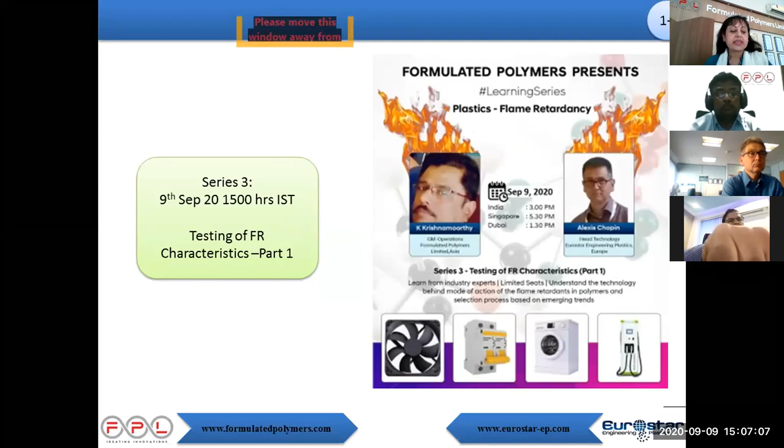So now after completing series 1 and series 2 - series 1 we discussed the history, need, and ISO classification of FR chemistry. Shekhar and Alexis both had given presentations and it was in so much high demand that we had to do a repeat series for that. Series 2 covered the FR mechanism and selection criteria.

Testing part 1 we are doing right now. Testing part 2 is scheduled for the 24th of this month. And then we will also be covering various standards, processing, and design perspectives. We have a total of around 12 series which have been planned by us.

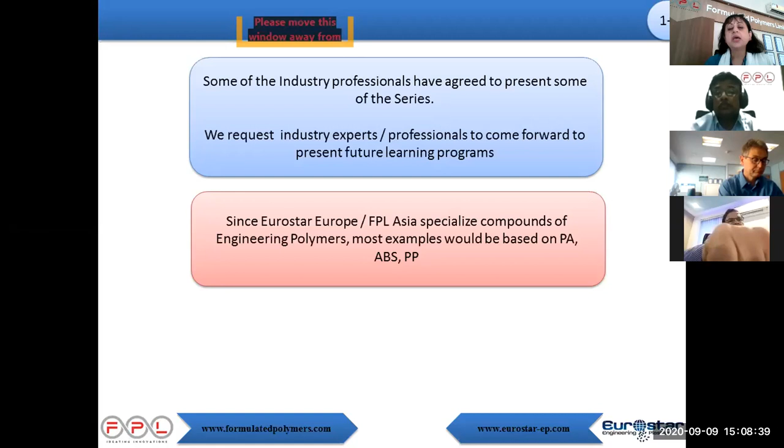Since Eurostar Europe and FPL Asia both specialize in engineering plastics, most of the examples are based on polyamides - both polyamide 6, 6,6, 4,6, etc., polyamide 12 - and ABS as well as polypropylene.

I would like to introduce the panel members. Shekhar is the director for Formulated Polymers. We also have Rasim Gibbs, who is the technology and marketing director for Eurostar.

Then we have the speakers. Mr. Krishnamurthy, who is general manager operations at Formulated Polymers, has a master's in science and over 29 plus years of experience in plastics. He has worked hands-on right from design, development, quality assurance, and compounding. He has a very versatile experience and has developed more than 300 new products in his career for the electrical and electronic segment as well as the automotive segment. He will be handling in detail the UL 94 flammability tests.

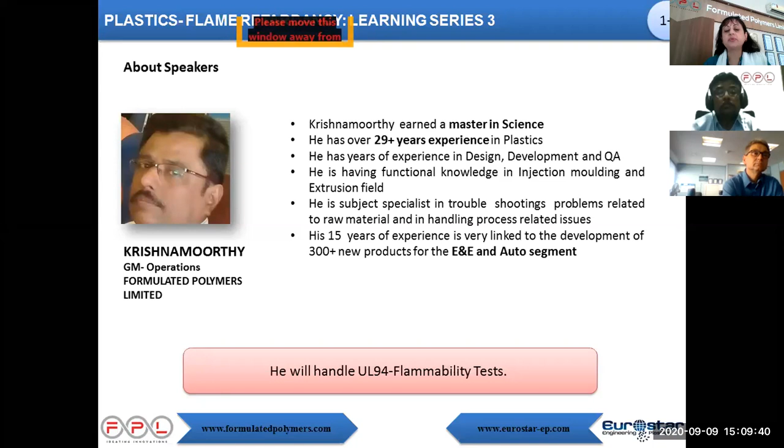The second speaker, Alexis Chopin, technology manager from Eurostar Engineering Plastics, has a master's in engineering from ITech Lyon. He has 25 plus years of experience in formulation, compounding, and application development, having worked quite comprehensively and extensively in the electrical and electronic segments. He's a co-applicant to many patents in FR engineering plastics and a specialist in low voltage and medium voltage control FR design. He will be discussing the glow wire test in detail.

These are the two tests which we identified, and we find them critical as far as flammability applications are concerned. They're also correlated with application testing. That's the reason why we are going to be covering these in much more detail.

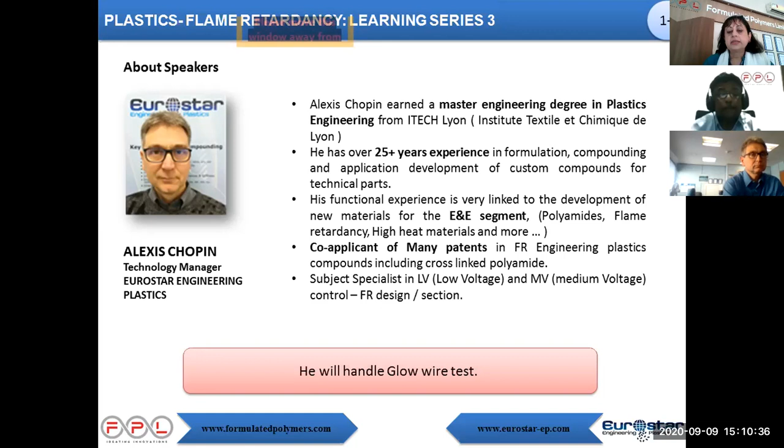We have done series 1, so I'll do a quick recap. Fire accidents are due to plastic usage, which has led to extensive use of flame retardants in plastics. Shekhar discussed the reasons why we use plastics and how they evolved over the years, from thermosets to thermoplastics like PVC, and now to engineering plastics.

For all those who missed the first presentation, we have the YouTube link available. Alexis, in that same presentation, discussed ISO 1043 and went into detail regarding the codification of the polymer used, the fillers, plasticizers, and flame retardants.

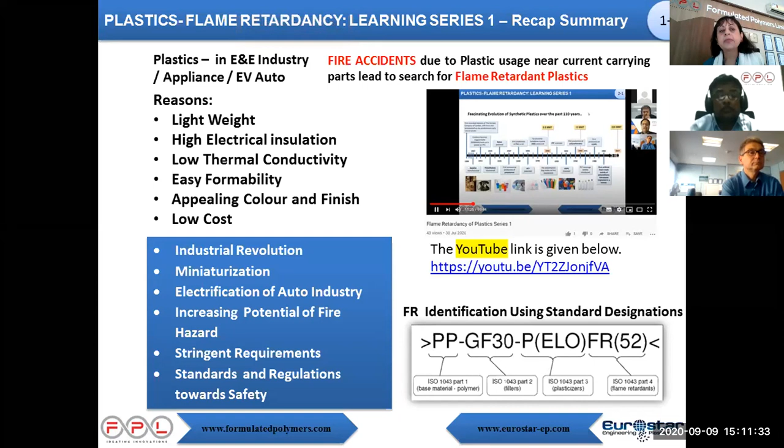We also did series 2, on the flame retardant mechanism and selection criteria. We discussed endothermic reactions, radical quenching, and thermal shielding processes. We also discussed in detail the halogenated nitrogen, organic and inorganic phosphorus compounds.

We also had a discussion on metal oxides, hydroxides, salts, boron and zinc compounds, silica compounds, and in specialty we went into polyvinyl alcohol. So we discussed almost all the flame retardants being used globally, and why one flame retardant is preferred over another.

The trend is towards more environmentally friendly and compatible FRs, mainly driven by NGOs and OEMs. Legislations like ROHS, REACH, and government legislations for each country are becoming more and more critical, and due to this we have also comprehensively decided on the selection criteria.

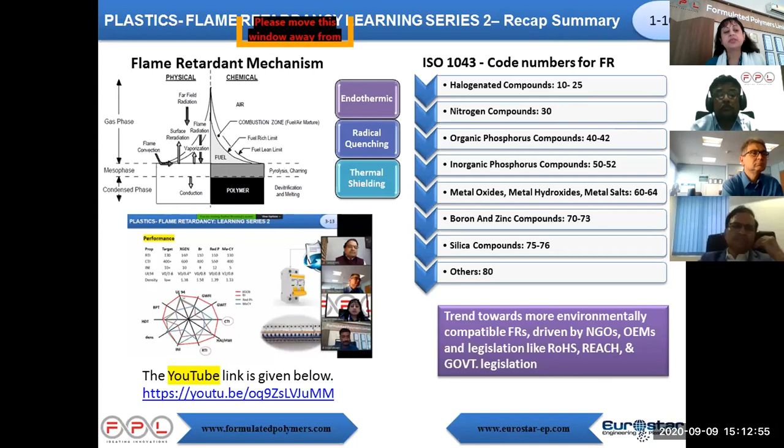Thank you, Rashmi, for my introduction and brief recall of previous webinar topics. Hope I am audible. Good afternoon, good morning, and good evening to all participants of today's webinar. In the previous webinar series, we discussed how plastics are converted into FR plastics and various types of FR formulations.

Formulation and product are ready, but it needs to be tested and validated before going to market. All pros and cons of product formulations need to be found before release as an end product. Testing is essential to find the strengths and weaknesses of a product. So in today's discussion, we are discussing testing of FR materials.

This slide shows various types of tests to measure flammability characteristics of materials. In UL 94, we have a variety of tests like horizontal burning and vertical burning. In vertical burning, we have a series of tests: V0, V1, V2. It tells the burning characteristics of the material.

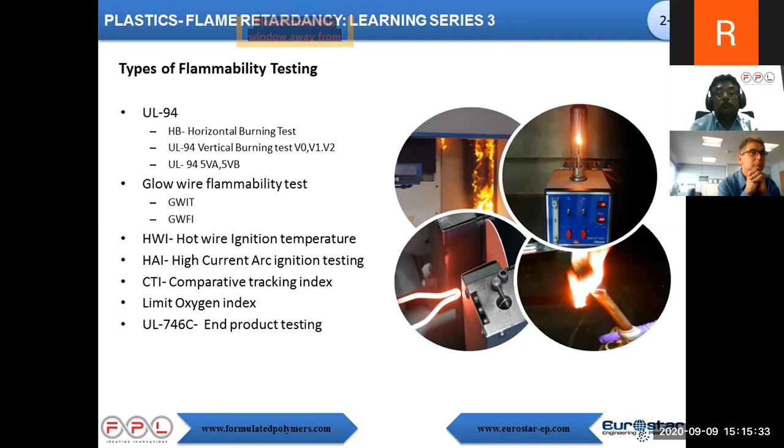Now we are going to discuss UL 94, which is the test for flammability of plastic materials for parts in devices and appliances. Before going into that, why do we need to follow the UL test method? This question arises in our mind. The reason is UL is an independent certified body of standards for safety, started in 1894, with almost more than 125 years of experience now.

Previously, raw material and end products were tested separately and reported as accepted or rejected. But UL changed this approach and tested raw material performance in the end product and reported accordingly. UL is uniquely positioned to provide a complete view of how the product functions within the given system, which is particularly critical for the plastic and component industry.

It helps to ensure safety for both users and manufacturers. The end product is less prone to malfunction, and it minimizes replacement cost. So the industry overwhelmingly accepts these test methods.

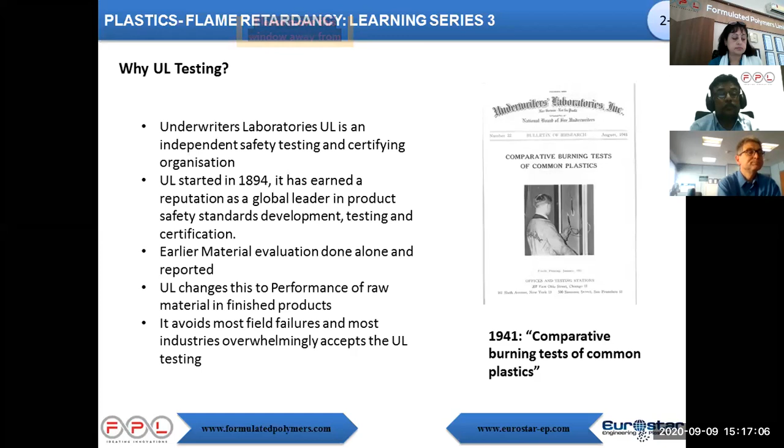This series of tests can help determine how products will react when exposed to flames.

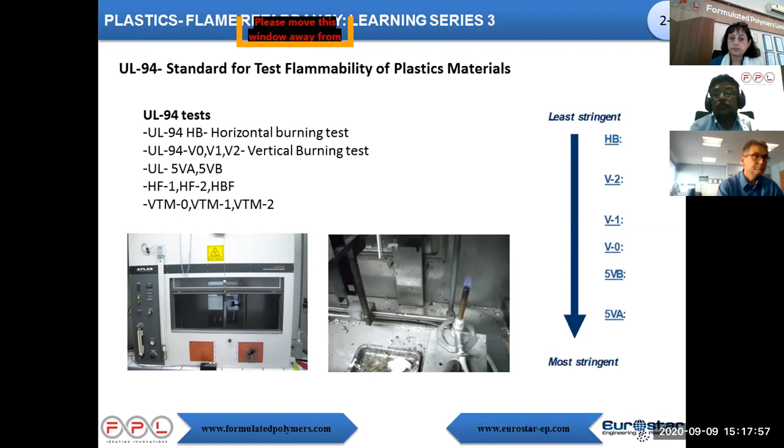Now we move on to test apparatus requirement and setup procedures. We need to confirm testing equipment or apparatus condition before going to any test.

First, we start with the specimen. Test specimen should have standard dimensions. You will prescribe the length, width, and thickness of the specimen.

For HB and V0 vertical burning, we follow a specimen length of 125 mm and width of around 13 mm, with a tolerance of 0.5 mm. Thickness is also important: it should be around 3 mm for horizontal burning, and for vertical burning it starts from 0.025 mm up to around 13 mm. So the maximum thickness should be 13 mm for all UL 94 tests.

Next important lab equipment is the burner, which is the heat source. The laboratory burner tube length should be maintained as per the dimension given on the slide: 100 plus or minus 10 mm. The burner should comply with ASTM D5025. Burner mounting fixtures have standard dimensions too, and it requires mounting at a 20 degree angle for some tests like 5VA and 5VB.

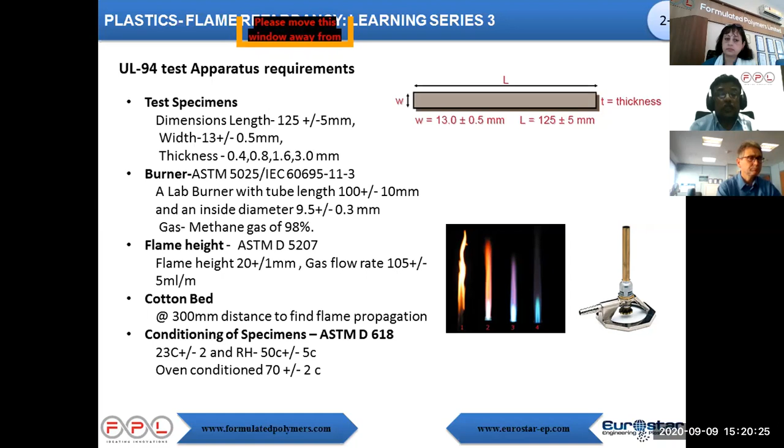Now we move on to horizontal burning test. In the horizontal burning test, the specimen is clamped in a horizontal position. The HB test is widely followed in the auto industry, as it tells the rate of burning of the plastic material used.

It helps the auto industry in a big way. Rate of burning of material helps calculate escape time for passengers in vehicles. HB rating is normally required for decorative items, unattended household items, air dryers, etc. It's applicable for all products, irrespective of flame retardant or non-flame retardant.

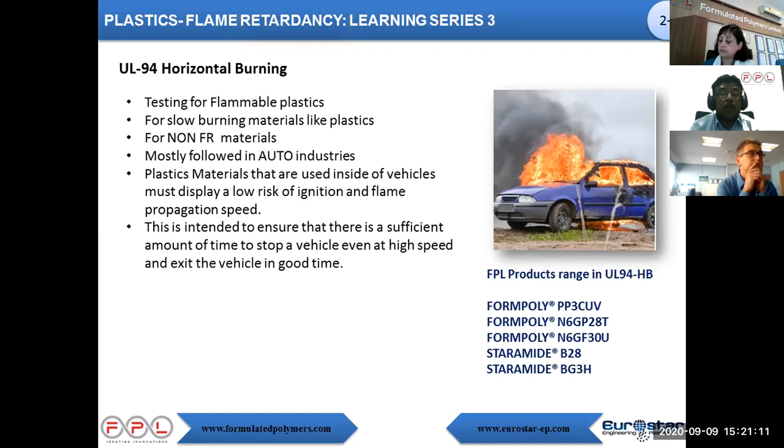Next, the slide shows the HB test procedure in detail. You can see a specimen of length 125 mm and width 13 mm positioned in a clamp. Ignite the specimen using the burner with a blue flame. The ignition time should be 30 seconds.

After the specimen burns to reach the 25 mm mark, we start the clock and find the burning rate. The acceptance criteria require a burning rate of 40 mm per minute for a thickness of 3 mm and more, and 75 mm per minute for thickness less than 3 mm. Fire should switch off before the 100 mm mark.

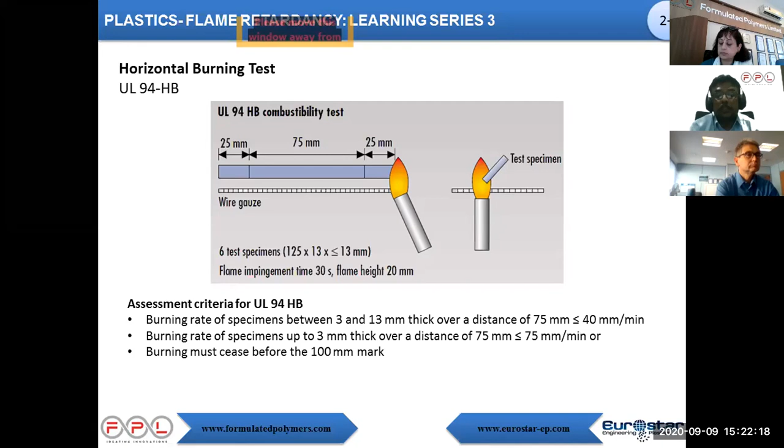Other HB tests like HF1, HF2 and HBF have similar procedures and test conditions. Only the specimen changes, for example to foam-like materials.

Now we move on to vertical burning test. In vertical burning test, we have types under UL 94: V0, V1 and V2.

Now we start with V0. The V rating is required for high concern areas and unattended household items like TVs, and for directly supporting live electrical parts like switches, enclosures, etc.

In the slide you can see a specimen of length 125 mm with 13 mm clamped vertically in the stand. Thickness of the specimen varies from 0.05 to 13 mm, but the normal thicknesses used will be around 0.4 mm, 0.8 mm, 1.6 mm, and 3 mm.

Ignite the specimen using a blue flame of 20 mm for 10 seconds, then measure the self-extinguishing time and record it. Flame the same specimen again for another 10 seconds and repeat the procedure. For a batch, we apply 10 flames, 2 flames per specimen, with a total of 5 specimens tested.

Acceptance criteria: total glowing time of 10 flames should not exceed 50 seconds in the V0 case. Individual specimen glowing time should not exceed 10 seconds for the first flame, and should be within 30 seconds for the second flame. No ignition of the cotton bed underneath is allowed for V0 rating.

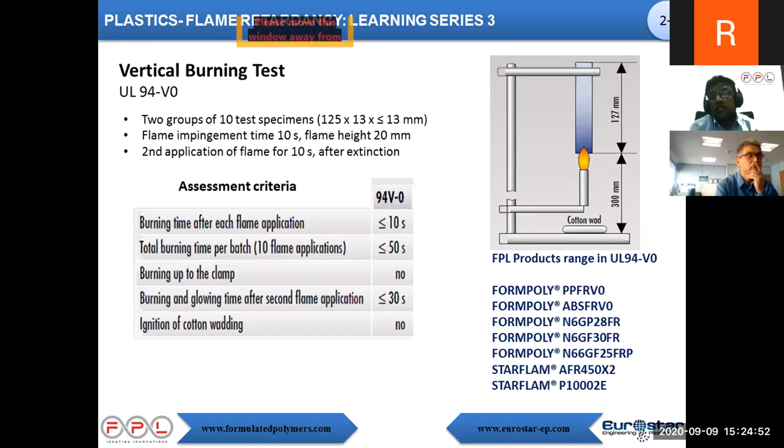A variety of products are available in Formpoly and Starflam ranges meeting V0 ratings. We can see the list: in polypropylene range, PP FR V0 meets the rating. In ABS, we have ABS FR V0. In unfilled nylon, we have Formpoly N6 GP28 FR. In glass filled grade, we have N6 GF30 FR, 30% glass filled nylon 6. In polyamide 66, we have 25% glass fiber filled. In the Starflam range, we have AFR 450X2, and P10002E, both meeting vertical burning V0.

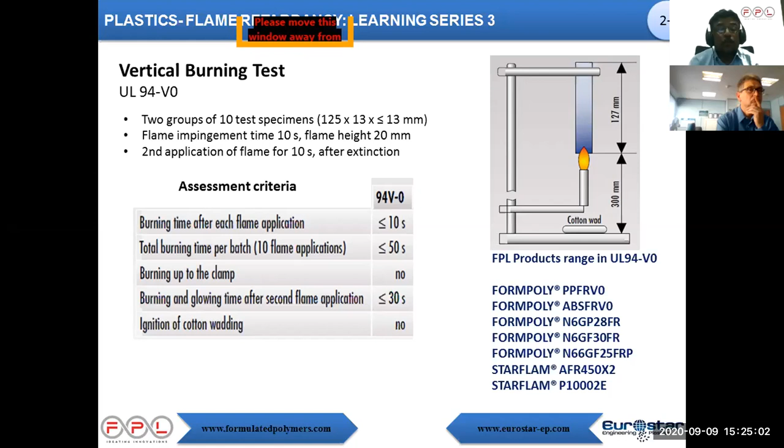Then we move on to vertical burning UL 94 V1 and V2 test procedure. The test conditions, specimen dimensions, and test procedures are the same as the previous V0 test. Only the acceptance criteria vary for V1 and V2.

Total glow time of 10 flames should not exceed 250 seconds, as against 50 seconds in V0 rating. Burning time of an individual specimen for the first flame should not be more than 30 seconds, and for the second flame not more than 60 seconds. The only difference between V1 and V2 is that the cotton bed underneath should not be ignited in V1, but it is allowed in V2.

Then in V2 range, we have a variety of products in both Starflam and Formpoly ranges. We have Starflam TK0052E, it is 25% glass filled, flame retardant V2. Then we have 20% glass filled BZ0040E. In Formpoly range, we have 20% glass filled, 20% mineral filled retardant, and 25% mineral and glass filled meeting V2 rating.

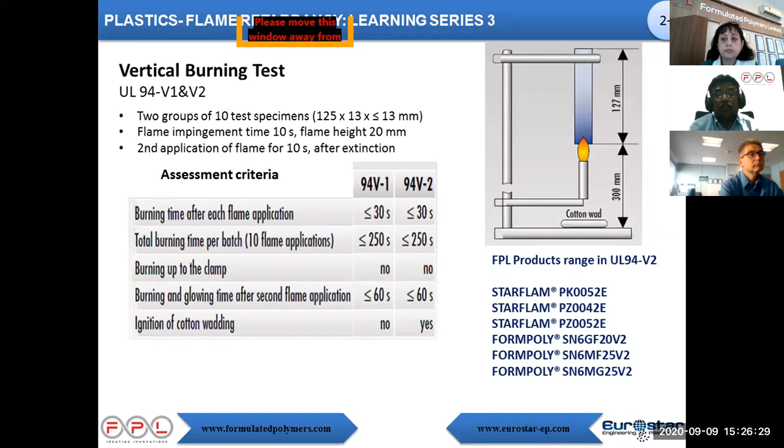And finally, we move on to 5VA, 5VB test details. Normally, this type of rating is required for highest concern areas like enclosures in stationary or fixed electrical live equipment. 5VA, 5VB test needs to be conducted on both bar as well as plate specimens.

Bar specimen dimensions are 125 mm by 13 mm width, as in the previous HB and vertical testing. But plate specimen should have 150 mm, depending upon thickness of the part.

For 5VA, 5VB test, gas flow rate varies to maintain flame height of 125 mm, and inside blue tip should be 40 mm. The test procedure: apply flame for 5 seconds, remove and wait for 5 seconds. Repeat the same for 5 times.

Acceptance criteria: total flame time of 5 attempts should not exceed 60 seconds. No debris found in the cotton bed underneath. No hole formation should occur for 5VA classification, but hole formation is accepted in the case of 5VB classification.

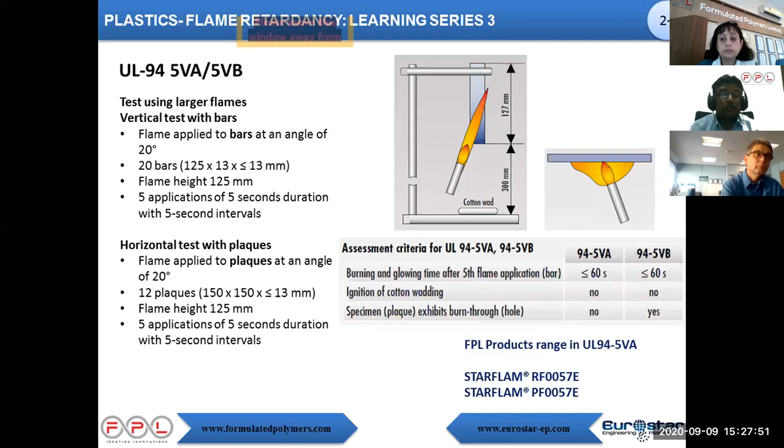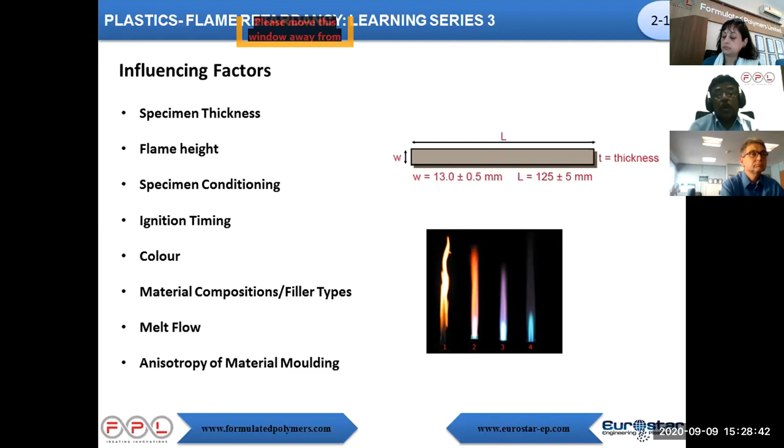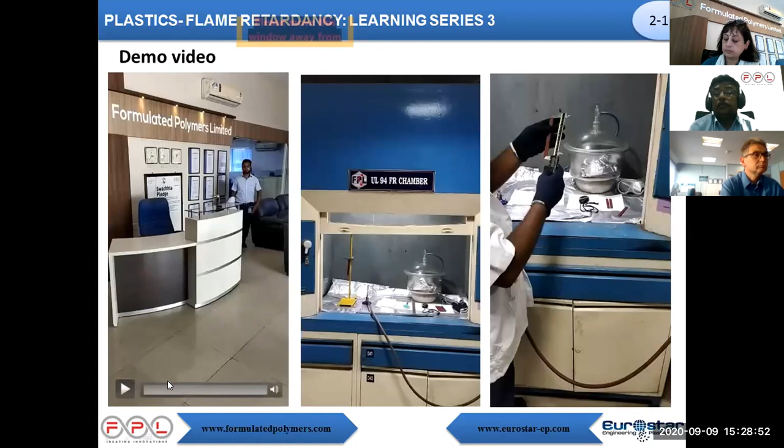Now we move on to the demo video of UL94 V0, V2 test. This video was taken at Formulated Polymers Limited India and Eurostar Engineering Plastic France labs.

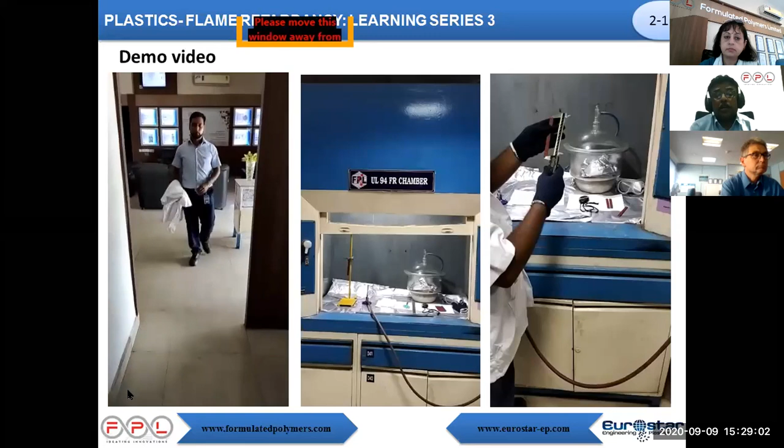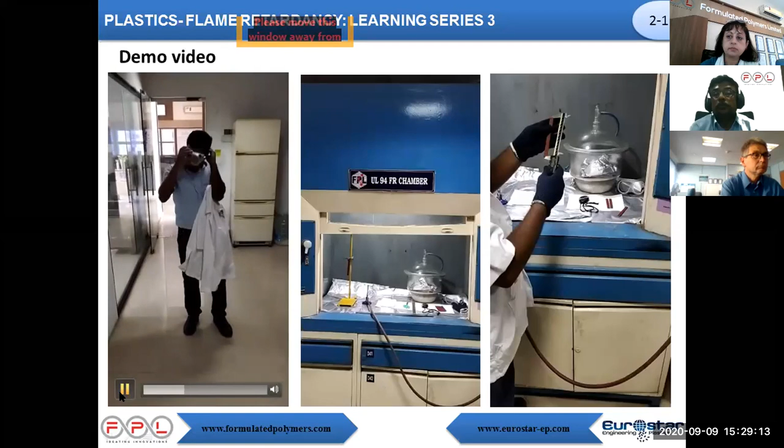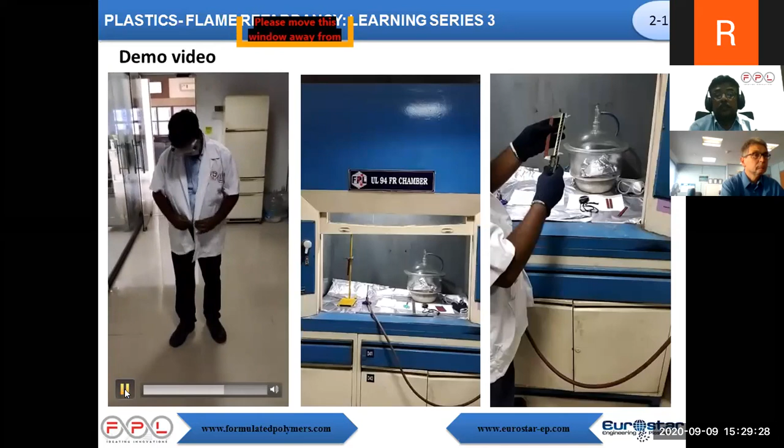For any laboratory test, we need to start with safety aspects. UL94 test deals with high heat, molten parts, fumes and flames. So lab persons who are assigned this type of test need to wear proper safety equipment before going for the test.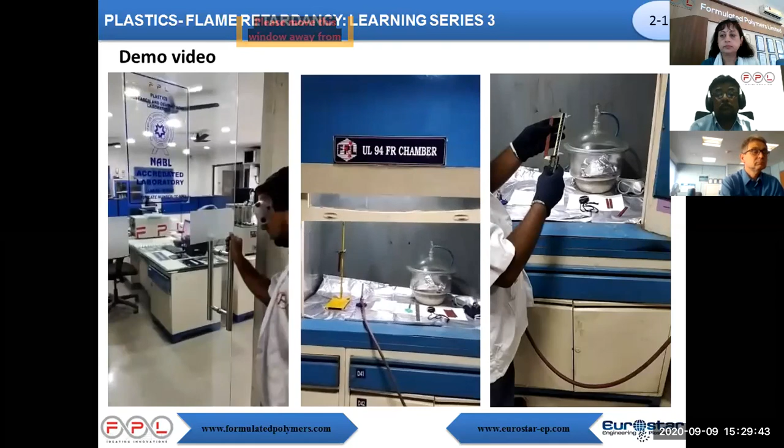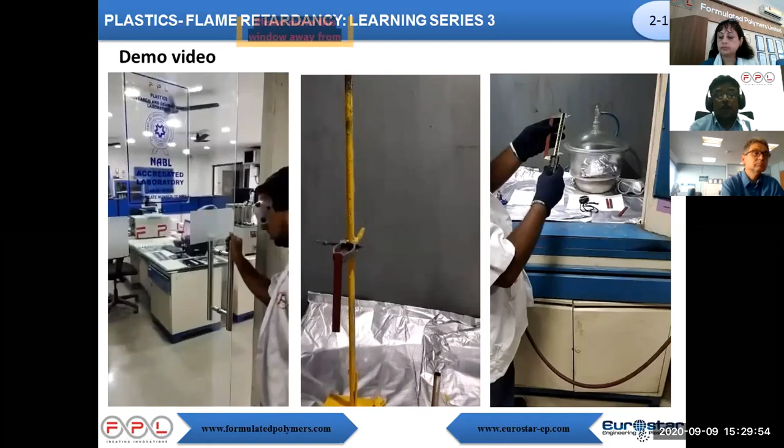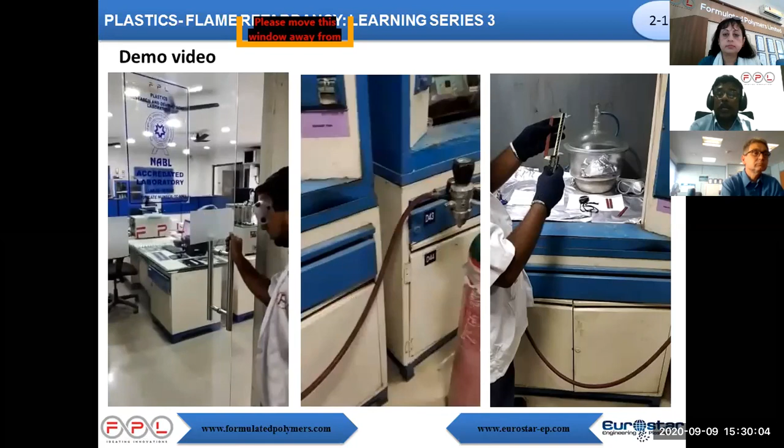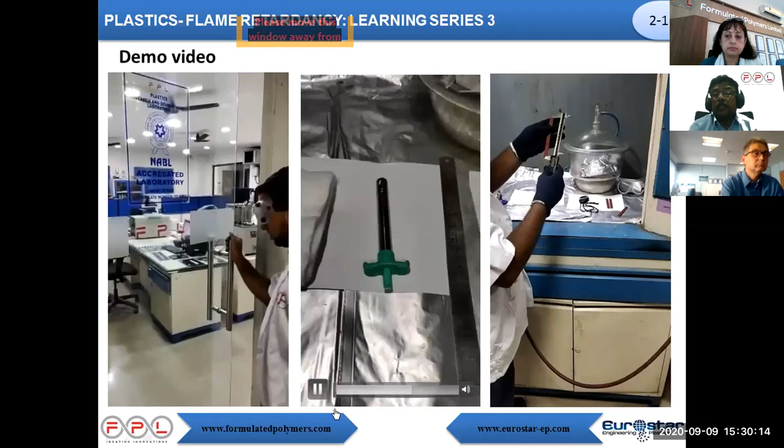Next part, apparatus required for the test. To do UL94 vertical burning test, we need a laboratory fume hood with proper exhaust facilities, then specimen holder, then Bunsen burner with wire at required length, then methane gas supply of 98% purity, then 100% absorbent cotton bed, ignition source, measuring scale, and timing device of accuracy 0.1 seconds.

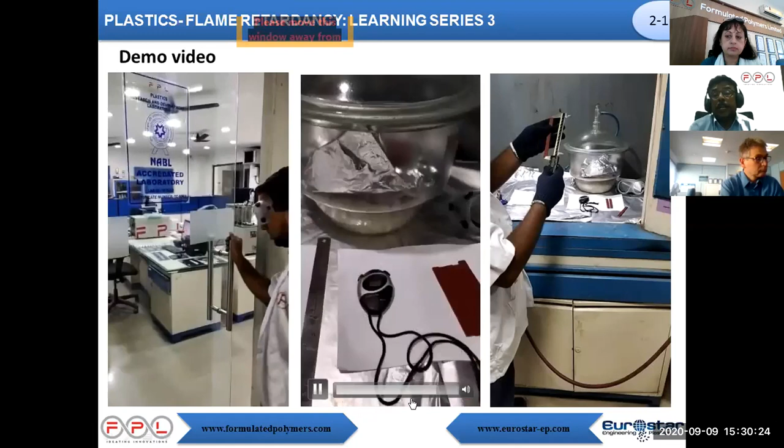Of course, specimens need to be annealed using a desiccator. Then finally, we need PPE of gloves and goggles.

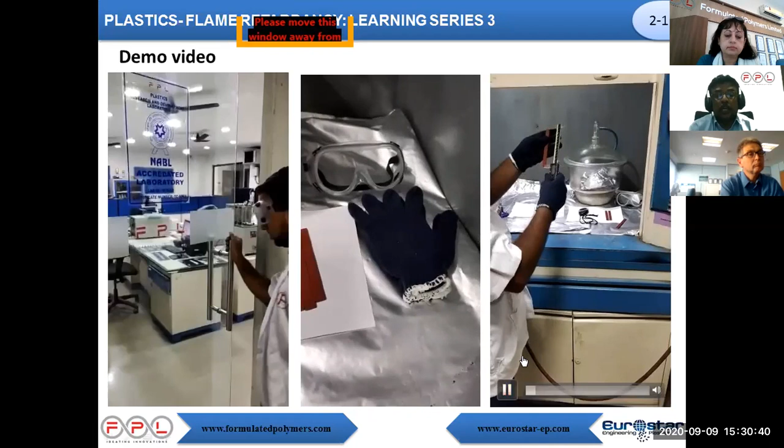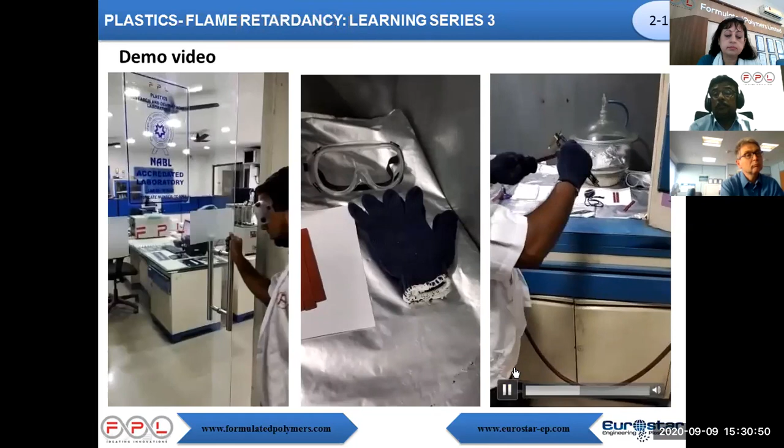In the next part, equipment setup: specimen length, width and thickness need to be measured and recorded. Then it should be positioned in the fixture at a vertical angle. Cotton bed underneath should be at 300 mm length. Flame height should be fixed exactly at 20 mm by adjusting the gas flow rate.

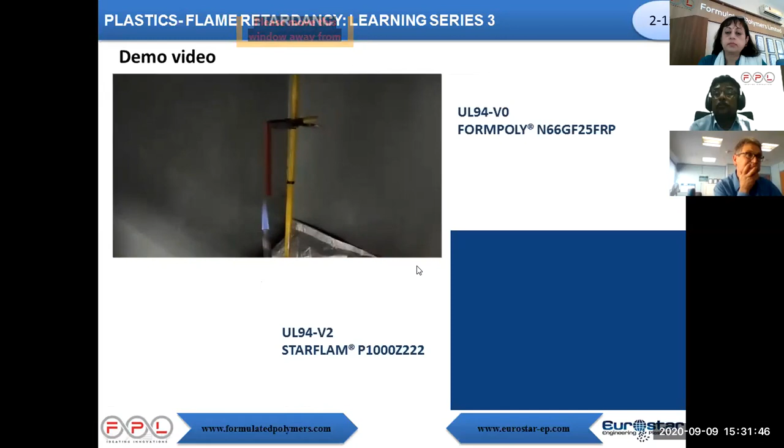We are seeing the UL94 V0 test, now performed using Formpoly N66GF25FRP material. Test specimen positioned vertically in the holder. Specimen ignited using burner for 10 seconds. Withdraw the flame, count afterglow time and record. Flame the same specimen again for 10 seconds, then record afterglow time. This procedure repeats for 5 sets of specimen.

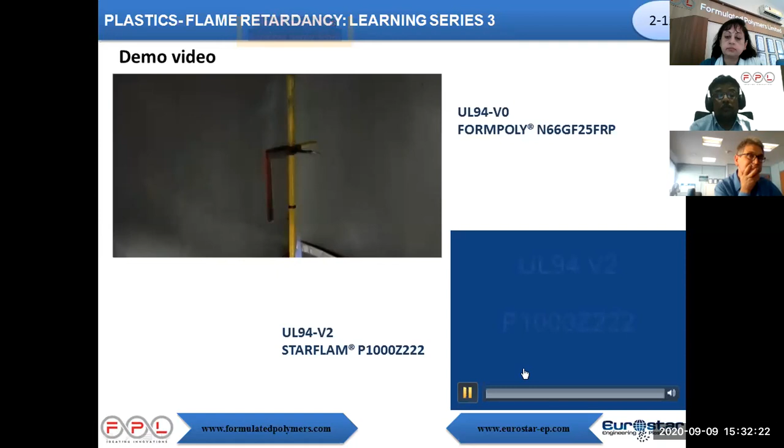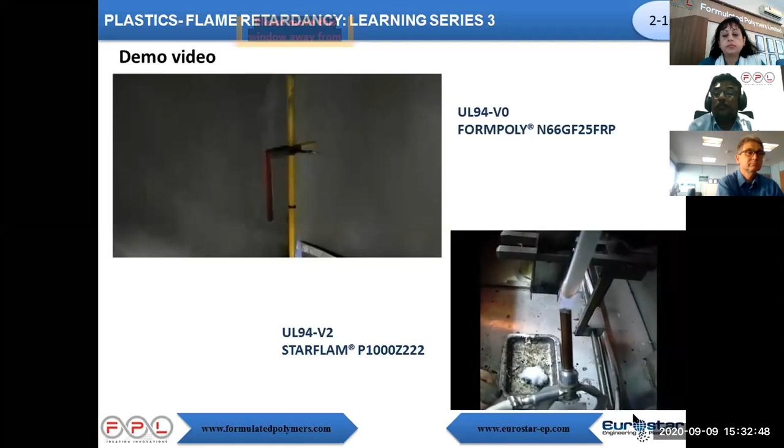Then we move on to the UL94 V2 test performed with Starflam P1000Z222. Procedure conditions are the same as seen in the earlier video. Specimen ignited for 10 seconds and withdrawn. Then we ignite the same specimen again for another 10 seconds. Then we need to record the dripping and cotton ignition condition.

Then, by referring to the lab observations and the acceptance criteria shown in the table, we can easily rate the tested material's flammability. That's all from the UL94 test.

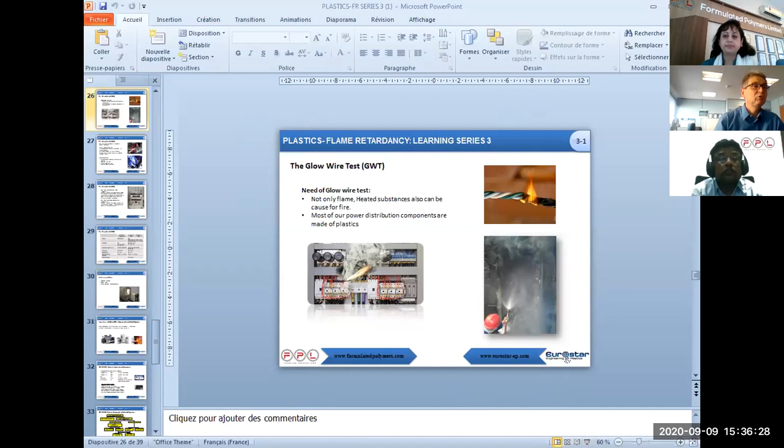Can you see my screen now? Yeah, we can see your screen, but you'll have to do a slideshow. I would love to, but I see I don't have the ends... is it okay now? Yeah, now it's okay. Cool, we are there. So very sorry for that, but we are in a remote location on the other side of the ocean, so maybe some electrons got lost somewhere.

So today I will talk about glow wire testing. It's another flammability test, as Christian Murphy explained, a different test measuring almost the same thing. But in the case of UL, we are dealing with an open fire, meaning a flame applied to the plastics, whereas in the glow wire test, we are creating overheat to create the flame.

This test was fundamental in Europe and is increasingly in use in Asia. It was not used in the US, but that tends to change, because parts are now produced everywhere and go worldwide. Until recently, if a customer designed a part for Europe and Asia, it had to comply with the glow wire test standard, and if it had to be imported to the US, it had to comply with UL. UL was perceived, at least in Europe, almost as a custom duty for plastic.

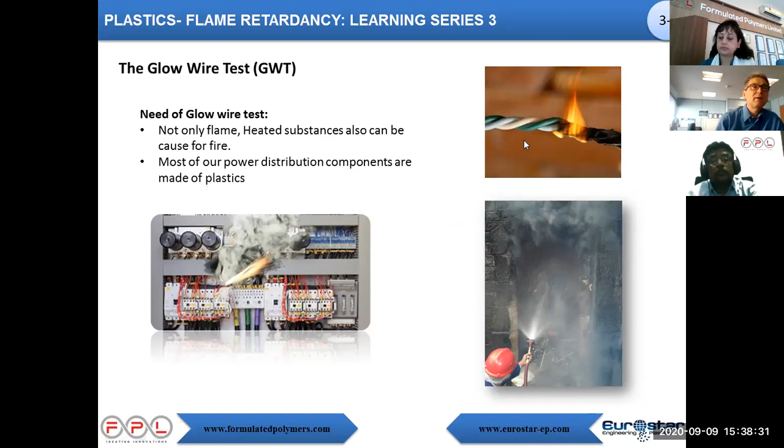It's also very true for wires, because they can overheat, and of course it makes sense if there is an open fire. So the glow wire test is used for parts, assemblies of parts, or individual components.

The test is quite simple in principle. You have a hot rod, heated to a high temperature, almost turned red, which is applied to a plastic spot. What we observe is the interaction between this wire and the plastics.

The criteria for passing the test is that when the wire is applied to the plastic, the specimen does not constitute an ignition risk to the environment. The flame should not last more than 30 seconds, and we check whether the flame propagates to the surroundings. The assessment criteria is a maximum penetration depth of 7 millimeters.

This is mainly due to the shape of the rod, which has a parallel section about 1 centimeter long, so it has to be tested in that parallel area. The force applied is 1 Newton, determined by the design of the apparatus. Application time is 30 seconds, and the burning or glow wire time must be below 30 seconds. To avoid propagation, paper or wood placed nearby must remain undamaged.

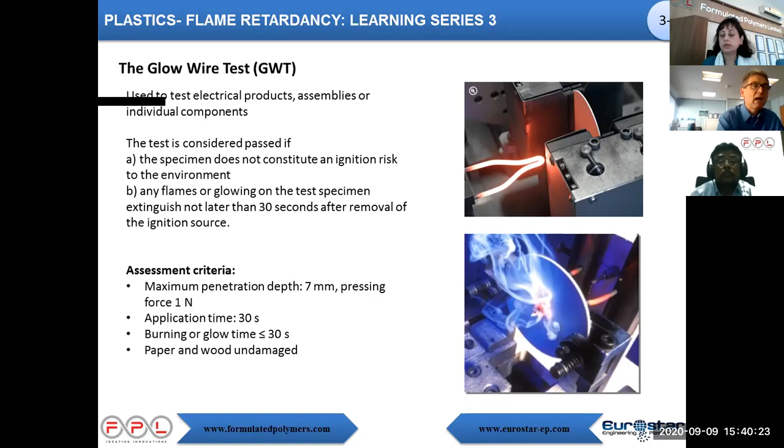So basically, the glow wire test has two different families of tests you can conduct, measuring two different things. The glow wire flammability index, so-called GWFI, is a test where you apply this wire against the plastics for 30 seconds and you see the reaction of the plastics: if it goes on burning, if it stops burning, if it propagates the flame.

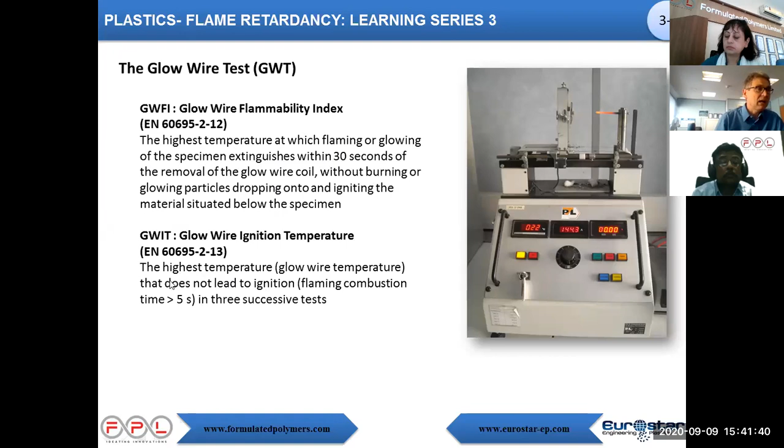The glow wire ignition temperature, so-called GWIT, is different in its operation principle. You apply the wire to the plastics and see if there is a flame, meaning you are not looking at the burning behavior of the material, but the ignitability of the material. This is why it's called the ignition temperature. So GWFI is the highest temperature at which the flaming or glowing of the specimen extinguishes within 30 seconds after removal of the glow wire coil, without burning and propagating the flame. The glow wire ignition temperature is the highest temperature that does not lead to ignition.

When you talk about glow wire testing, you have the glow wire test itself, the glow wire flammability index, and the glow wire ignition temperature. The difference is in the standard: when it ends with 11, the test is run on a part - this is the glow wire test. When the test is run on a sample, it can be a glow wire flammability index or ignition temperature test.

Conditioning is the same as explained before for UL. It needs to be conditioned, of course, because some materials, especially some polyamides, pick up moisture. And you can imagine that a material which picked up too much moisture will be less sensitive to fire.

Temperature of the glow wire: for the test, there are very precise temperatures from 550 to 960. You may ask why those temperatures. I think 960 is very self-explaining because it's very difficult to calibrate those wires, and 960 is the exact melting temperature of silver, meaning that when you calibrate the glow wire test, you put a tiny piece of silver foil on the wire and see when it melts. 960 being a sharp melting point for silver helps calibrate the wire. It's been the standard for many years, but of course it's very stringent.

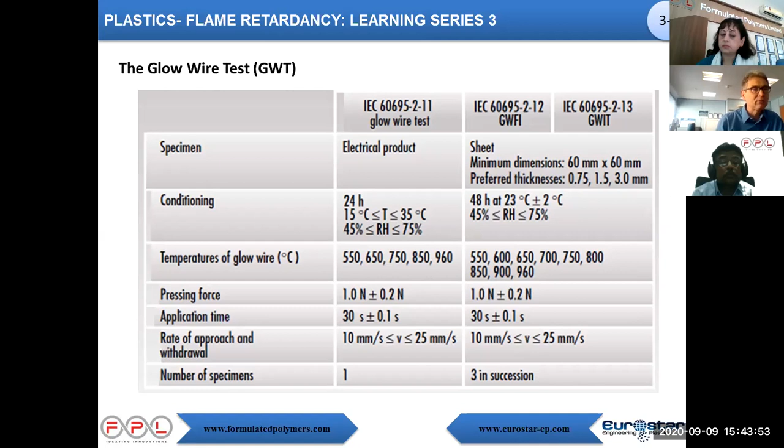Now there are temperatures in between for different applications. The pressing force is 1 Newton - it's design related, you cannot avoid it. The application of flame is 30 seconds. The rate of approach and withdrawal of the wire is important, especially for GWIT, the ignition temperature, because if you have a shock, or if you go too fast or too slow, you can change the measurement. This is why modern apparatus are now automated - you don't have control over this otherwise.

The influencing factor - here you see the test we have. You see the wire, which is very heated. It should be 960 degrees, because around 850 it's red, but around 950 it's almost white or very yellow. So in principle, this sample holder is moving toward the rod, the burner, and you are measuring the interaction.

Influencing factors are specimen thickness. This is especially true for glow wire flammability index, because the wire goes through the plates, and the time to go through the plates is the time that the wire heats the material. It's less important for GWIT, the ignition temperature, which is more a surface-related measurement, because you are measuring the interaction between the fire and the plastics.

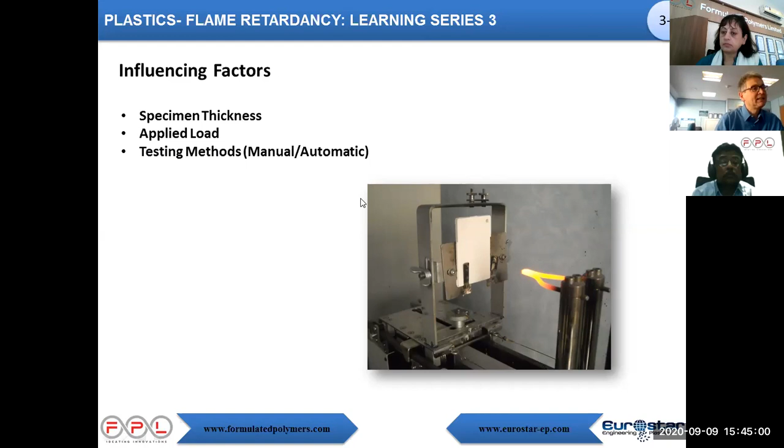Applied load is fixed, you cannot change it, and the testing method can be manual or automatic. It is very important for an unattended device. What is an unattended device? It's basically what we call white goods - material or parts that you cannot really keep an eye on. For appliances, this is mainly, for example, washing machines.

When you wash your stuff, you are not sitting beside the machine to see if it works fine - you are in another room, another place. By opposition, attended devices are ones you have in hand or under your eyes, and if there is a failure, you can easily unplug or remove the plastics from the wire.

Important in those applications is the intensity, which is related to it, and the limit is around 0.2 amperes. Above 0.2 amperes, you say it's quite a high current, and below 0.2 amperes is more a common signal. The risk of flammability, simply due to the Joule effect, is less.

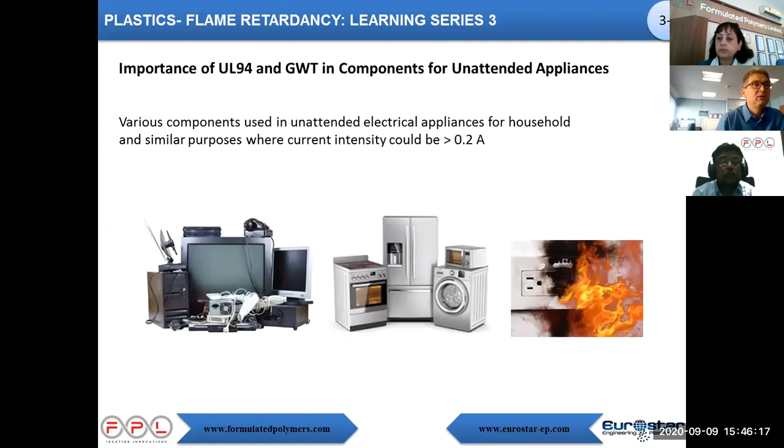So IEC 60335 is really applied to household appliances, and it's where we have more of a request, which is the more stringent test. You need to pass the GWIT at 775 - this is ignition temperature - flammability index 850, ball pressure test, which is a kind of thermal measurement of material resistance, and flammability, as explained, most of the time V0 is needed at 0.8.

Tracking index is more related to the electrical resistance of a material. Once more, this standard is very limited to household appliances, but nonetheless people, even in automotive, are looking at this test, because for them it's sometimes more representative than UL for a failure - because in this case there is no open fire, there is an overheated component due to an overload.

There is a bunch of sectors which do not apply. For example, video is another standard, medical purpose is another standard, handheld is the easiest one because you can have a control on it, and computers are really related to other standards. Nonetheless, this glow wire flammability index tends to be a very universal measurement now.

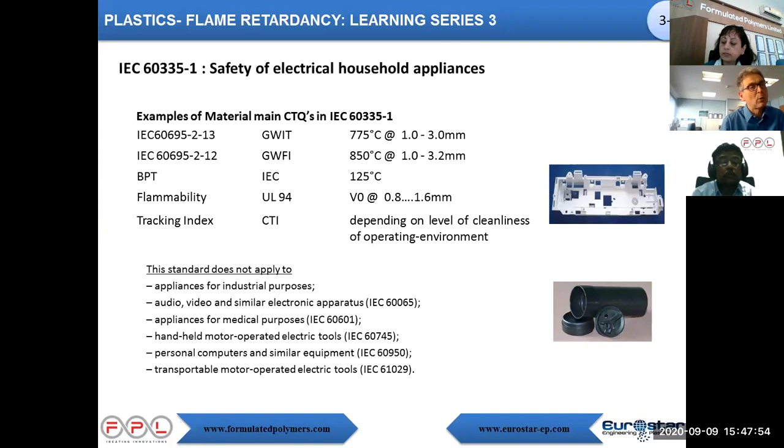I won't go too much into detail because time is flying by, but basically, if you are designing an apparatus, two things are very important: is the plastic at more or less than 3 millimeters of the live part? The live part is the part which is in contact, direct contact, conducts current but can overheat. If yes, then you have to follow this flow chart. If no, then you have another question.

Does my material carry more than 0.2 amperes? Yes or no? If it's above 0.2 ampere, then no way, you have to survive a glow wire flammability index of 850 and pass a test on part at 750, and then you are there. If the material is below 0.2 amperes, it's an easier test: you need to comply with 650 glow wire, or you have a GWIT of 675. In case of below 0.2 amperes, it's quite simple.

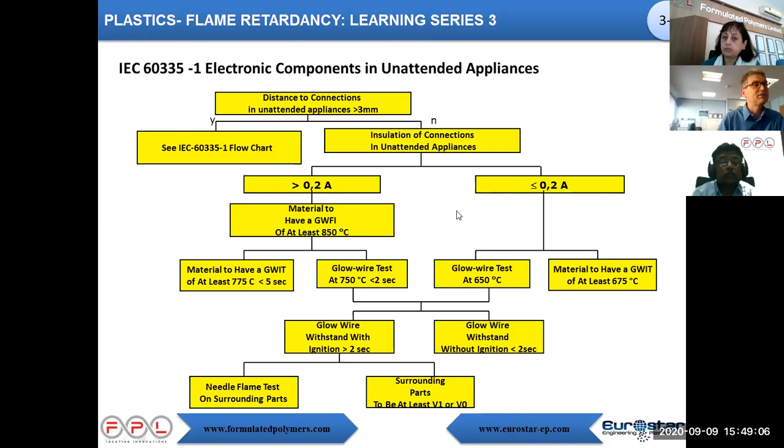We will take a bit more time on this slide with material having more energy, meaning more than 0.2 ampere. So you have two routes: you can make certification testing on samples, or you can test on part. If your material has a certificate of GWFI 850 and GWIT 775 on samples, your demand is fulfilled.

But you can test on part. In this case, you test at GWT 850. If the test is passed and you have a certificate, you're done. If you don't have a certificate, you can test on part, and if it passes without ignition, you are done. In the case you cannot survive a test at 750, then you have another route.

You can pass the so-called needle flame test. The needle flame test is a simplification of a UL test. The flame is very tiny, and you apply it for 30 seconds, but basically it's almost a burning test. Another way would be to make sure that all the surrounding parts are minimum UL 94V1.

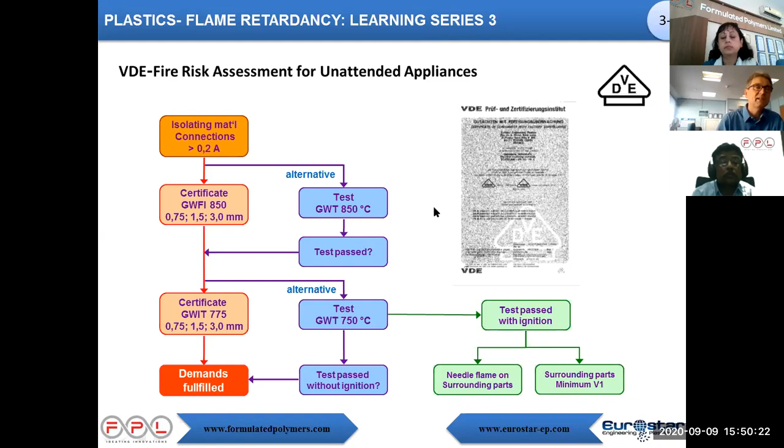Let's go now into real things. So the glow wire test—I'm launching the video. On this one, you see it's 750 degrees Celsius. You see the wire automatically applied to the part, then the part touches the material and heats by conductivity.

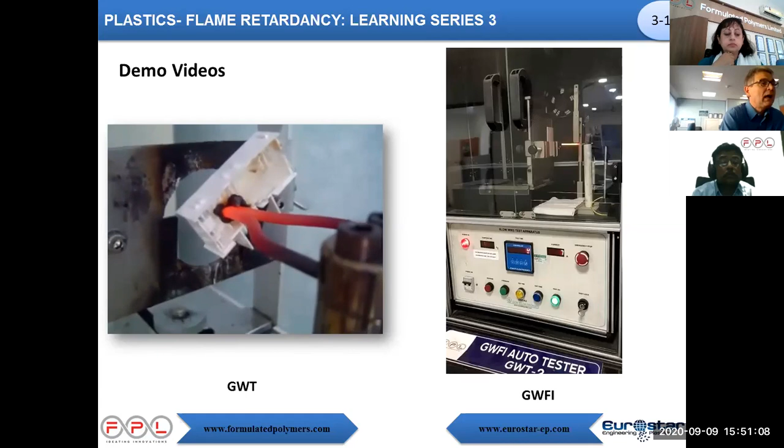It's now overheating. You see the material is almost not burning, but charring. In this case, it's quite well done because the charring takes place, the material fumes, but you cannot see the flame. To pass the test, you need to have a flame below 3 to 5 seconds, and in this case, there is no flame at all. So at the end of the 30 seconds, the wire is removed, and in this case, it really passed the test.

Then you will see a test made at FPL India on their apparatus. Here, the same thing—they are launching the test. The wire is applied to the plastic spot. You see immediately, the wire is very hot—almost white, so it's 960 degrees Celsius.

So of course, we don't have a material that fulfills everything in every situation, but we are quite proud to say that within FPL and Eurostar, we have a solution for almost everything. It's just a matter of selection, a matter of choice. And as glow wire does not compare with UL, a material that passes UL 94 V0 at 0.8 can fail glow wire, and a material that passes glow wire can fail UL because there are different types. But nonetheless, within our range, we really have a solution for all.